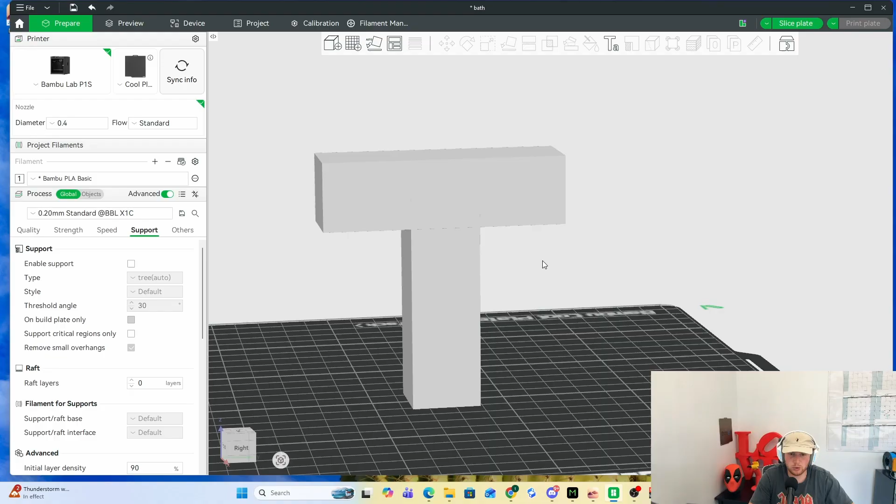And what we're going to do is turn on our supports. So go over to the support tab. You're going to see enable support. And when I first preview the object, with no settings changed, you're going to see I have these trees here.

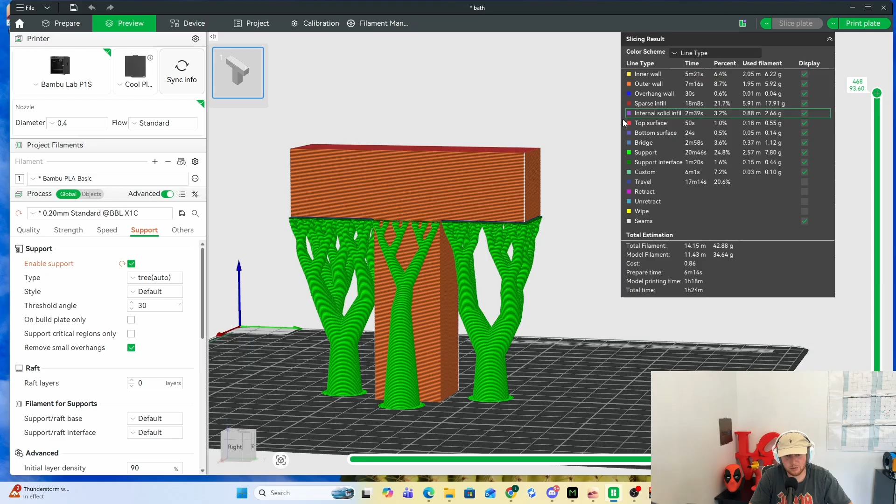Now, if you don't see this view and it looks like the object's all one color, go to the top right. You'll see it says color scheme. If you're under summary or filament, it's going to show you all one color. I like to be on line type so I can see where the supports are separating from my object.

Now, if you don't have supports on and you try to preview an object that clearly needs supports, if I go over to slice, it's going to warn me that I have too much of an overhang, and you're going to see that bridging right there, where you'll probably have a very bad print where the filament will just either fall to the plate or try to bridge as much as possible and have a lot of drooping.

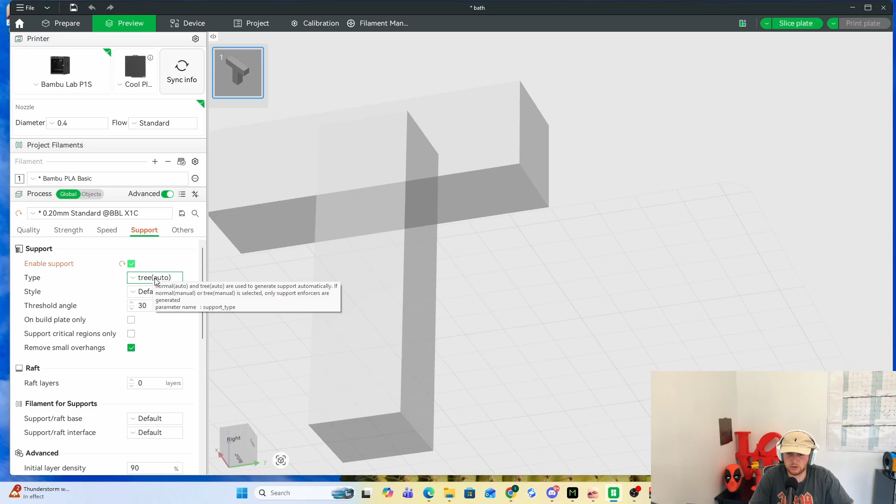All right, so I'm going to enable my support, go over to tree, and I'm going to also select the normal. So what that's going to do is change the pattern to more of a grid. This doesn't really change the time too much depending on the model. So I'm an hour and 14 minutes for model printing time. If I go over to tree, you'll see it's an hour and 14 minutes.

So it changed 1 minute for my total time, but for the model itself, it really didn't make much of a difference. Now, if you're doing something a lot bigger or maybe like a small minifigure where it's going to surround the entire thing with the grid support, that might be a problem and cause a lot longer of a print.

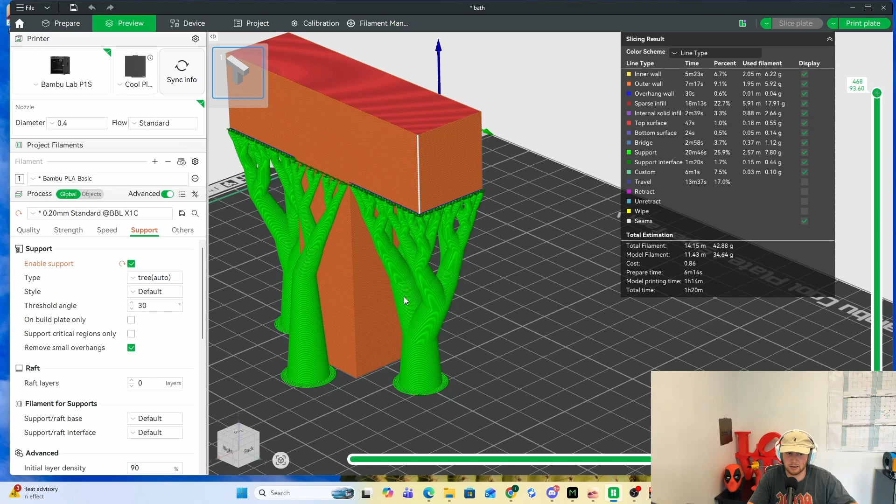Okay, so I personally like to use Tree Auto. I'll stick with the default a lot of the time, but sometimes if I'm doing something really small and I don't want a ton of supports, I'll go to Tree Slim, which does save you a lot of time. As you can see, it went down like 10 minutes.

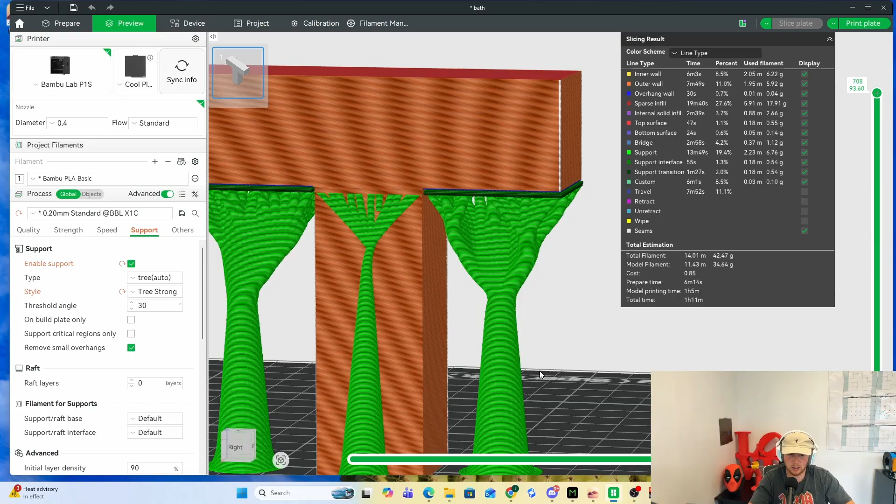So when it comes to using Tree Strong, if you want one big piece that you can kind of just break off, this usually is the best option. So if you have a large flat surface, you can use Tree Strong. It will make one big base on the bottom and then an easy snap off for the top.

Now you'll see there's kind of like a dark green layer here. This is called your top interface layer, and you'll see it's kind of separate from the tree itself. So this is what helps you actually connect all the trees together and pop off the support at the same time. You can increase this by going down to the Advanced tab, top interface layer, and going to 4.

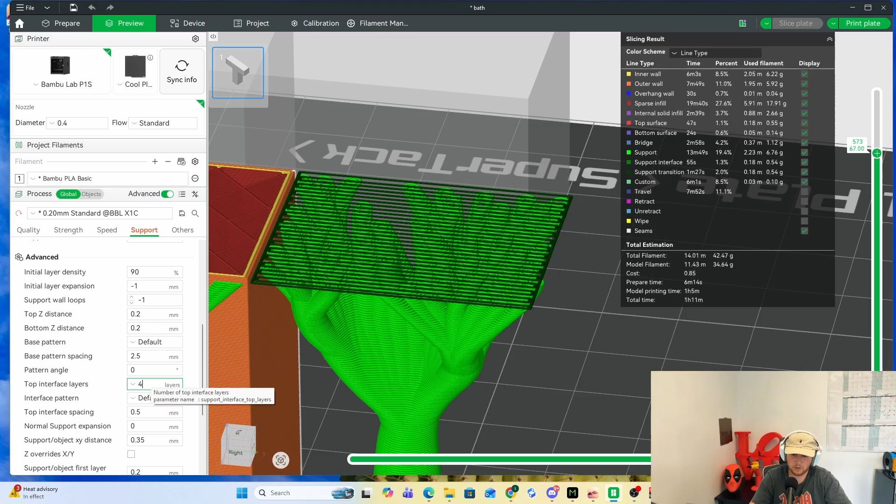I like to have more of a top interface layer if I'm doing a very flat surface like this one. It seems to break off a lot easier. Now, if you don't see that top interface layer setting, it's because you have the Advanced tab selected off. So if I were to go to there, you won't see any of those settings. Click it, and now I'll see a lot more.

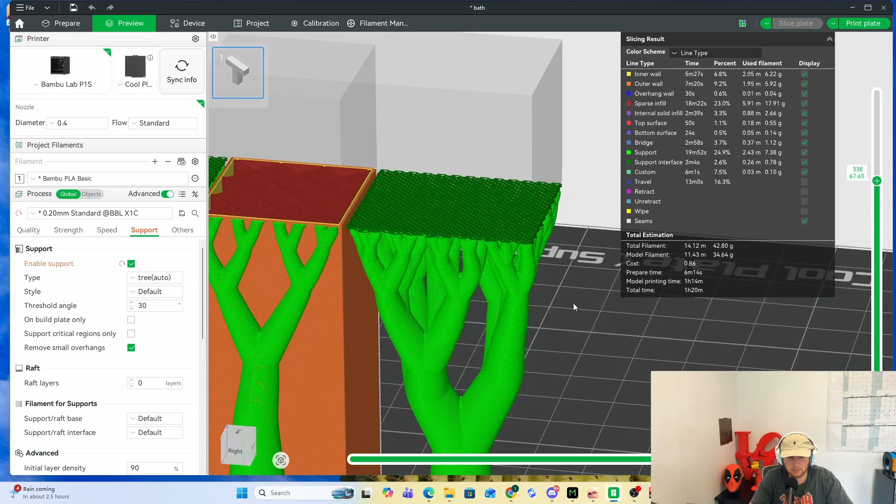Now I'm going to select back to default because this is what I use the most. But if you see when I slice my model and I click back up here, you're going to see a slight gap between the support and the object itself.

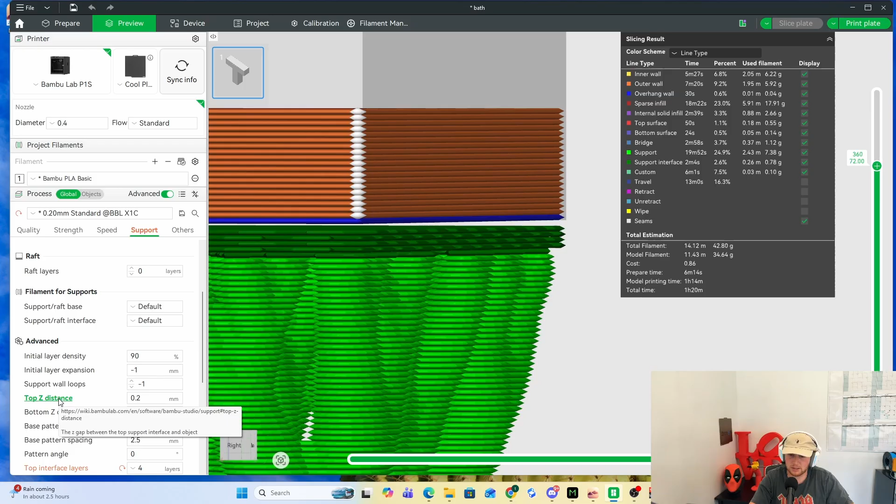Now, you want that because the slight gap, yes, it might cause some imperfections on the model. Usually not if you have your support settings right, especially with those interface layers. But if you have too much of a gap, it will cause major problems. Now, the way to change that gap is to go down to top Z distance. It's selected at 0.2. So that gap right there is 0.2 millimeters.

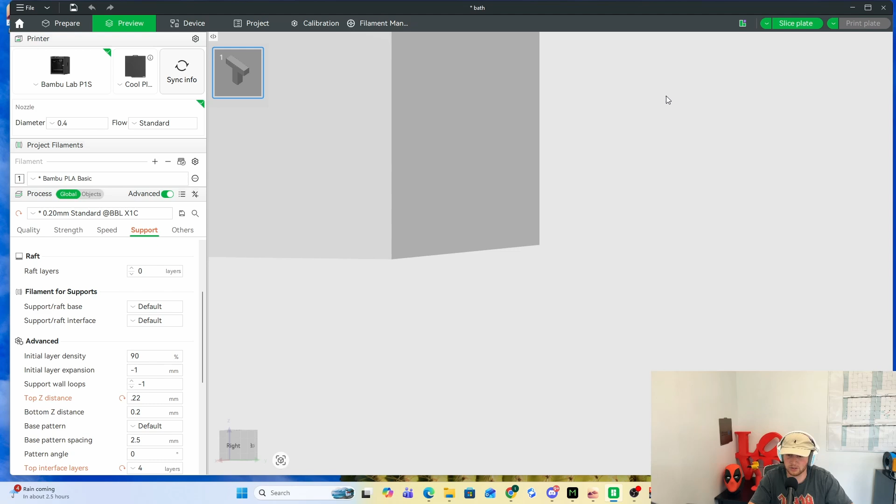If I were to go to 0, for example, it's going to make it so that the support is touching the object with no gap. But the issue with that is then it's going to stick to it. So it's going to be impossible to get those supports off. My personal preference, I've been sticking to 0.22 to 0.24, and that causes enough of a gap to not stick and to still come off super easily. So here's that gap with the 0.22.

Now there is a setting called support raft base and support raft interface, which allows you to use other materials as your support interface. So let's say, for example, I add another filament. Make sure it's not the same filament, because if you're using the same filament, they will bond to each other. We're going to use a PETG. So if we have PETG here and we use this setting...

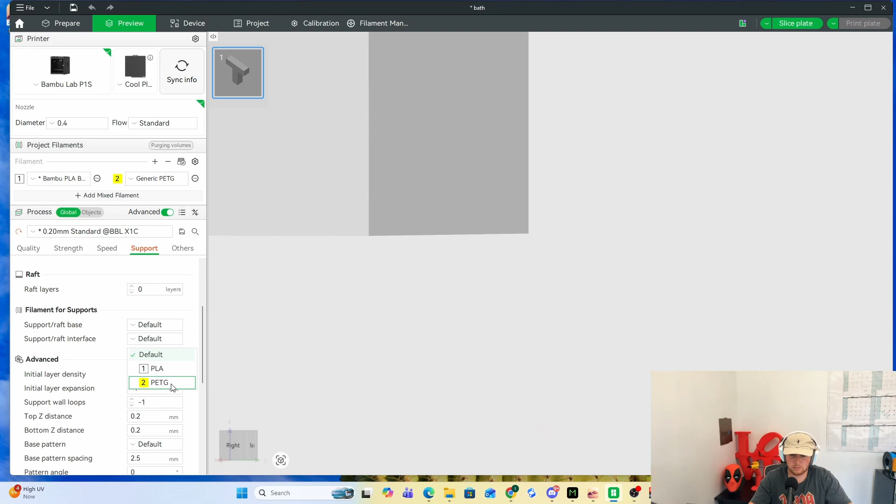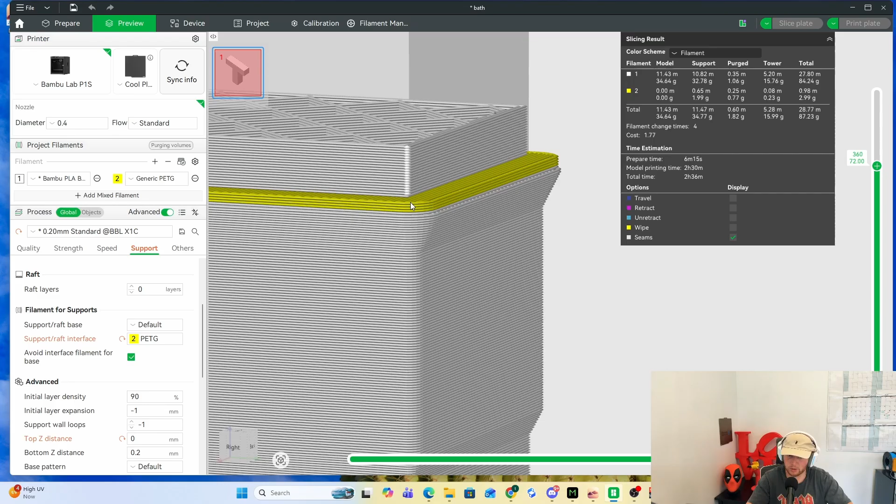You're going to see I select support/raft interface. It's going to make my top Z distance 0. So what that's doing is it's connecting the object. Let's go back to filament. You're seeing it's connecting the object to here, but the reason it's not going to stick is because they're separate filaments, which means they don't melt at the same temperatures, and it will cause them to break away from each other and not adhere.

Now that is more of an advanced setting, but it is really nice to know that you can actually make the surface perfect and have the filament almost literally touching the object. But you need to make sure you have the right settings on and that you know how to use your AMS machine correctly, which again we'll get into more of this stuff later on in our steps.

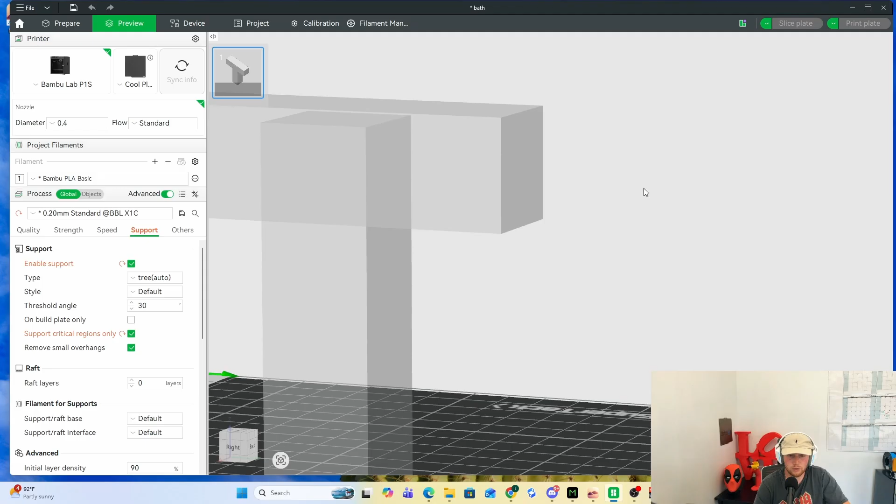Now you'll see there's also a setting. It says support critical regions only. If you select that, it's going to only put the amount of supports that it thinks it really, really needs in order to make the model without it failing. But personally, I usually just either paint my own supports, which I'm going to show you in a second, or I just let the slicer do its job without the support critical regions only, because I don't mind having more supports since my supports are dialed in.

I obviously won't use this one. It automatically changed this for the 0 distance here, but I do like using the trees and letting it go, and really not worrying about trying to save a little bit of material for the risk of the object breaking.

So now when it comes to painting supports, all you have to do is select the type, and you'll see there's 2 options for manual. Manual means that you're selecting where you want the supports, and if you mess up and you don't have the supports in the right spot, the print's going to fail. So we're going to select tree manual.

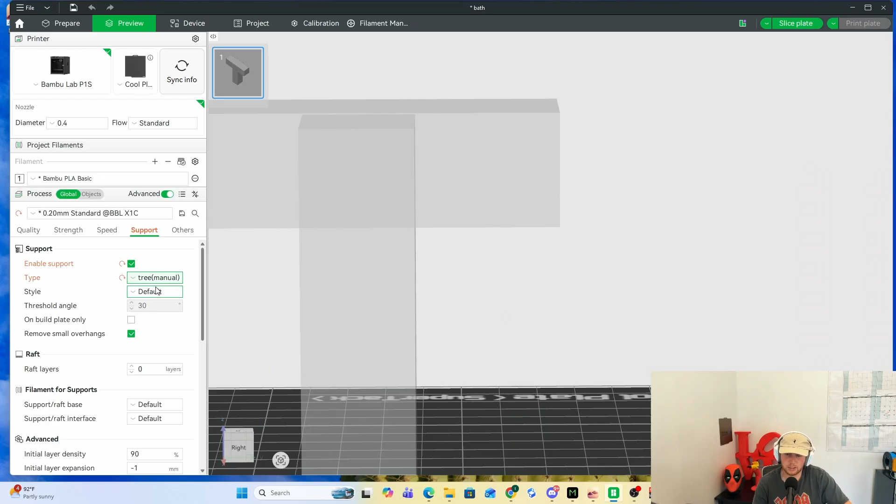We're going to go back to prepare, and you're going to see there's a little option here that says supports painting, or push the L key. So click that. I'm going to go over to the area I think needs the support, which we know is this overhang here. If I select it with the fill button, it's going to fill in this whole region here.

And you can change that smart fill angle to be lower. Because I have such flat faces here, it's not going to change anything. If I were to have an object that has a ton of triangles, it will let me select to the smallest triangle. And then if I increase the smart fill angle, it will try to detect a whole region.

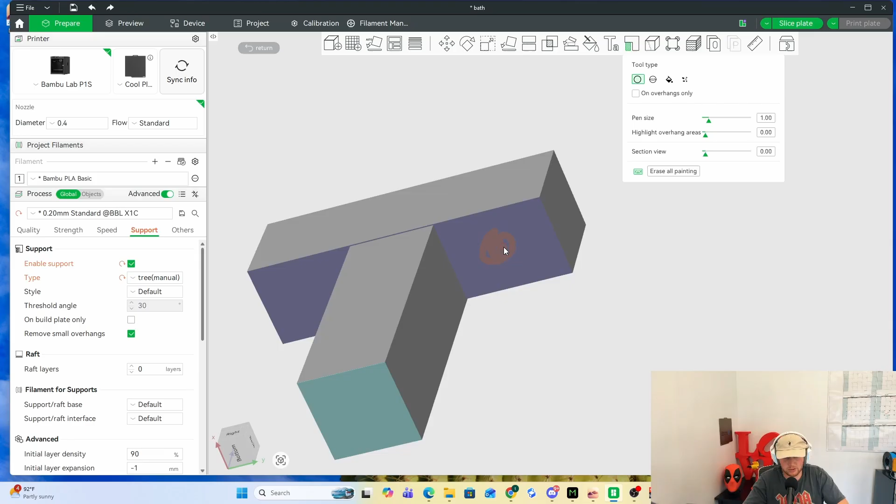Now, another cool feature is being able to block out supports. So let's say I have this whole piece that needs supports, but I don't want this middle section here to have supports. I can just use this paint tool and right click instead of left click. And you'll see that when I generate my supports, there's a slight circle in the middle where there won't be any supports.

Now the last setting is just your support speed. If you go over to the speed tab and you scroll down, you'll see an option for support. If you'd like to slow down your supports, sometimes that can be really helpful to make it so that the supports aren't breaking off of the plate.

If the diameter of the supports are super thin, which is under this tree support setting, sometimes they'll break off if there's a lot of vibration or the nozzle gets close and maybe you have a setting wrong. So just make sure that you have your bed temps correct so that the tree supports can stick properly. If you really need help, you can use brims for the objects, but personally with my settings, I haven't needed to use that.

So yeah, that concludes the support video.

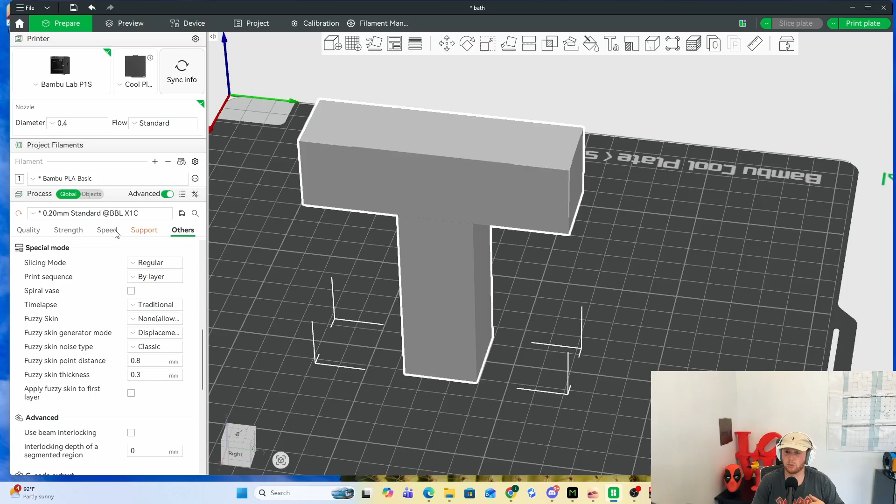I know it was a quick rundown and there's a lot more to supports, but we're going to get into that a little further down the road. This is more just to give you a base for how to start using supports.